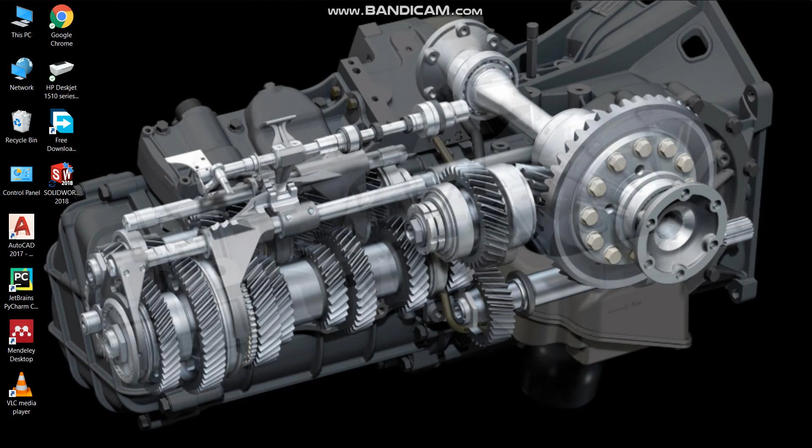So let's start the video. Okay, first of all open SolidWorks, and go to File, New, okay.

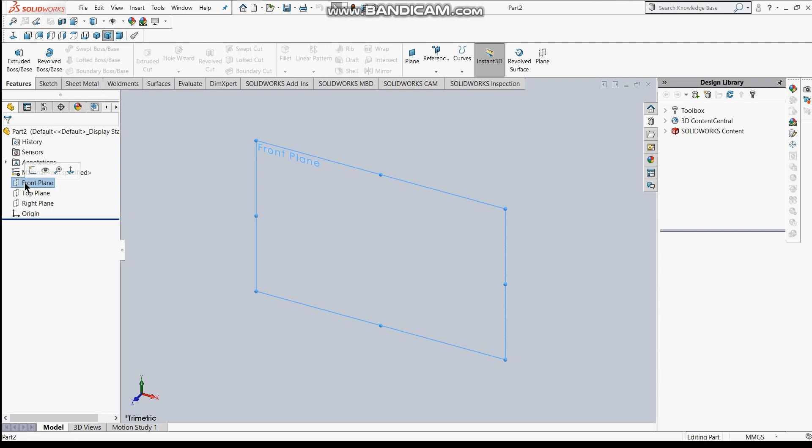Go to sketch. I have already told you to choose any of the planes, so I choose the front plane here. After clicking sketch and okay, go to rectangle, because fillet and chamfer are done on perpendicular edges, so we have to choose rectangle here.

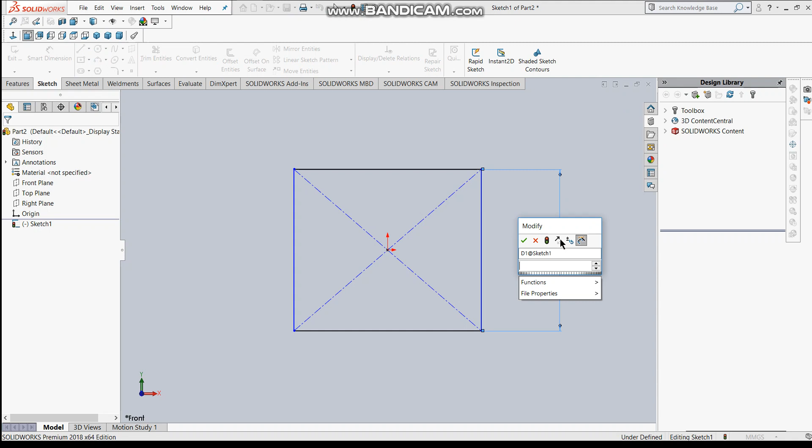So make the rectangle and put a dimension of 100 by 100. Okay, your figure is ready.

From the sketch, as I mentioned, we learn fillet and chamfering from sketch, so it's easy. You see this curve-like shape, and there are two options: one is sketch fillet and another is sketch chamfer. I'm going to choose fillet in these two corners here and chamfer here and here.

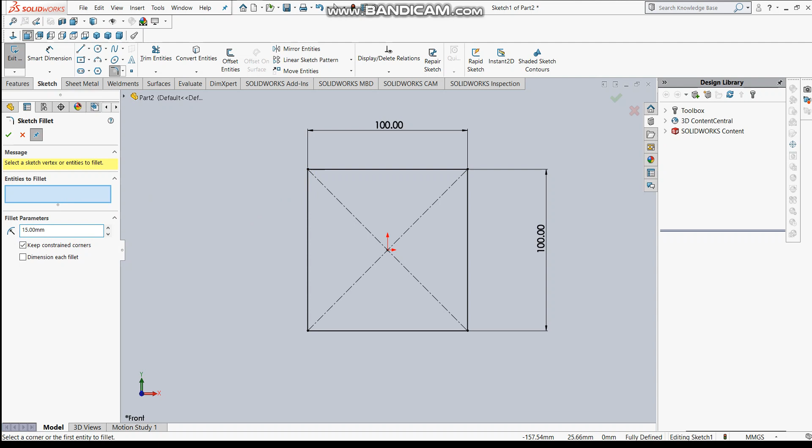So choose fillet first and click this point, you have to click this point. If you want to put some dimension, you can put it from here. I want to put 15, okay, 15 radius fillet, one here, another here, and click OK.

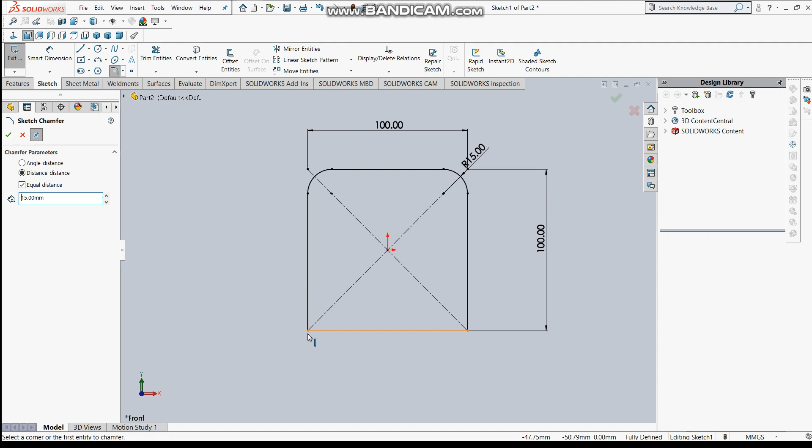Here you can see the preview, the diagram is ready after fillet. In these two corners, I want to put a chamfer of equal distance by distance, meaning 45 degrees, so it will automatically create a 45 degree chamfer. I want to put 15 here, same dimension down there, so choose this and click that vertex point, then choose OK.

Here your sketch is ready with fillet on top corners and chamfer on bottom corners. Go to Features, Extruded Boss Base.

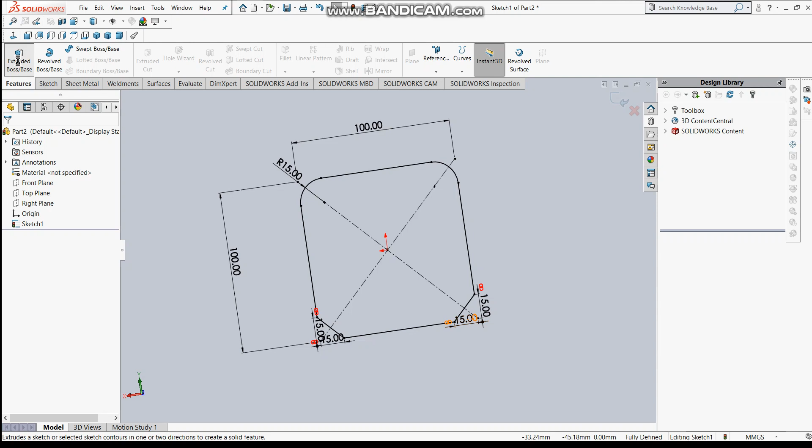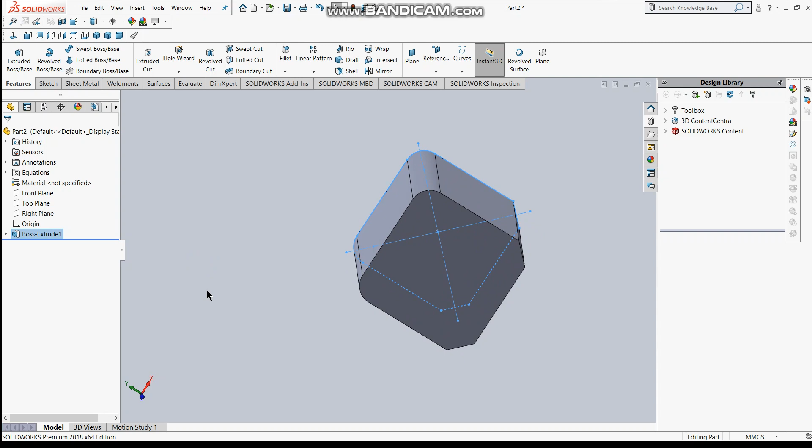Now this is your preview, and I want to make it 100 mm, so you can see the preview here. The difference between putting fillet after extruded boss or before sketch is there's no need to worry about the edges. You can do it faster than doing fillet and chamfering after extruded boss base, so it's faster to put fillets this way.

And you can see our corners, these corners are removed. So if you want to put some fillet, we can do it after extrusion.

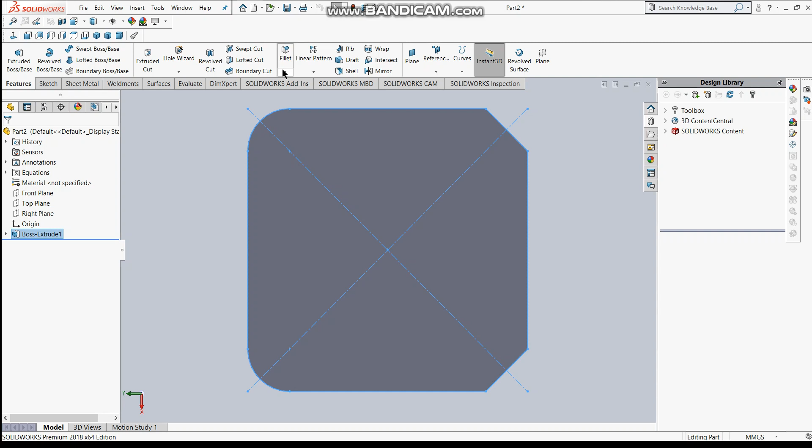If you want to do that, just go here, fillet here, and choose okay, choose chamfer. For this you have to select the face or any edge. If you select these two edges, let's see what will happen.

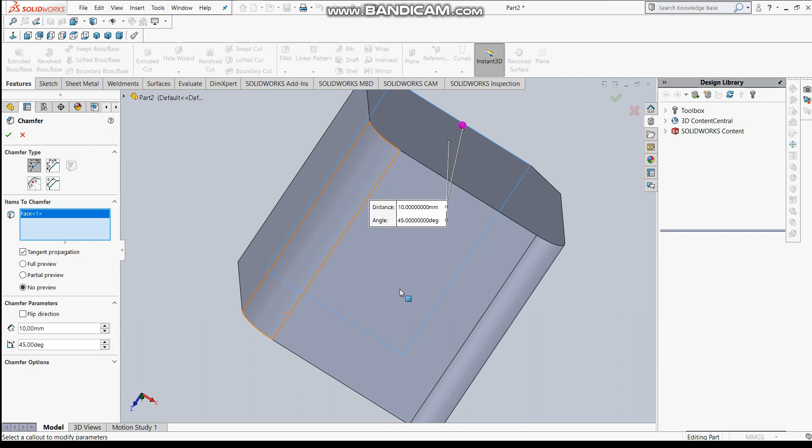This is the opposite edge, and choose this. Okay, then 45 degree, 10 mm. If we click OK, let's see what happens. It reveals that one of the chamfer dimensions is out of range.

So what we'll do is just click OK. It's showing that it's denying the chamfer in this fillet shape.

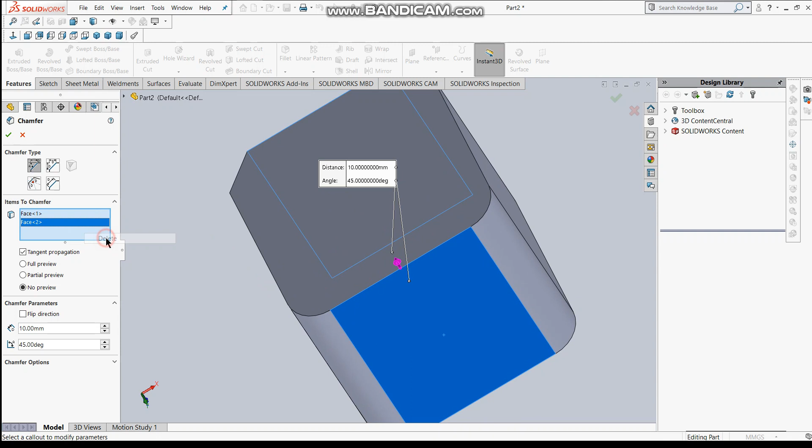If you deselect this, remove this, let's see what happens. It reveals one of the chamfer dimensions is out of range, so just delete face one. Okay, the selection is cleared.

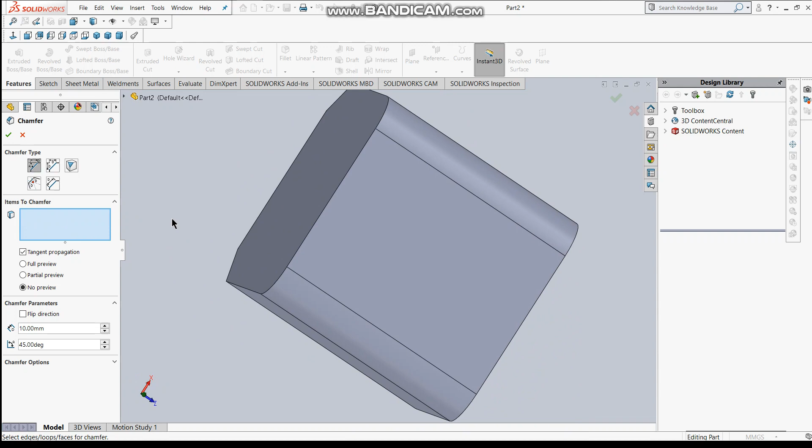If you choose fillet, let's see what happens. Chamfer first, okay, this is chamfer. In this edge, it's denying to have chamfer in this face.

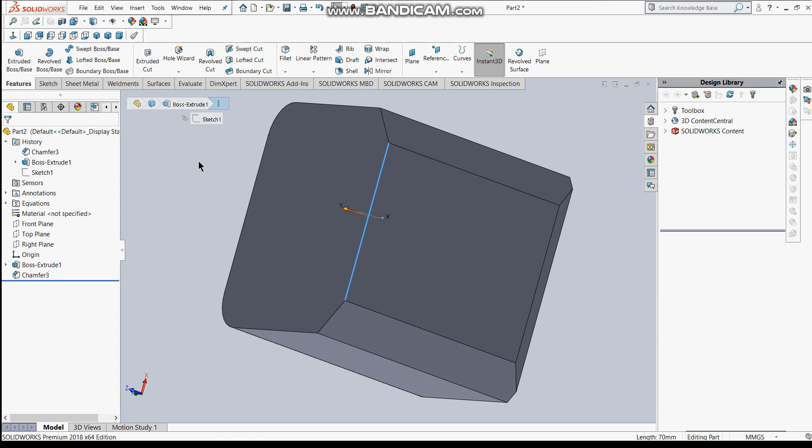So in this edge also I want to put some chamfer. Go to chamfer. Okay, 10 into 45 degree, that's fine. You can see here this upside of the model is all chamfered.

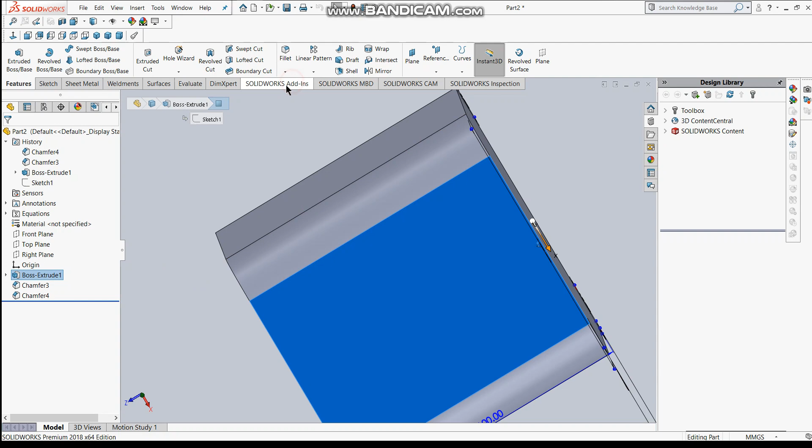We'll see about filleting on this bottom face. Just select this edge and go to fillet. Face 1, 10 mm, okay, what will happen? Let's see. Okay, this is our model. Upper part is chamfered and lower part is filleted, you can see.